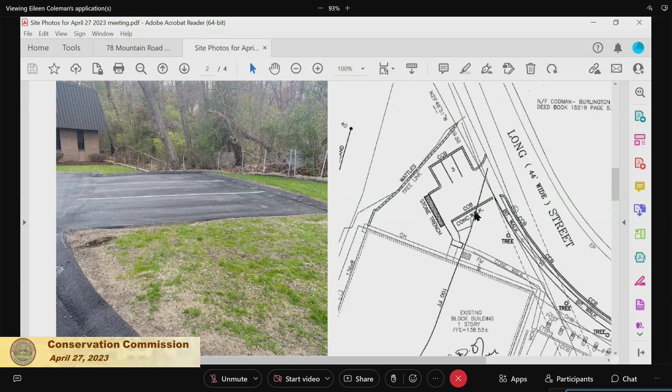Eileen, you want to? Sure, it was a pretty small project. It was adding some parking spaces, shown here, to a lot at 24 Terry. They had done an NOI to make a large addition to the lot, then closed that out, and then realized they actually wanted to add these spaces as well, so they had to do a whole other NOI. Pretty small project.

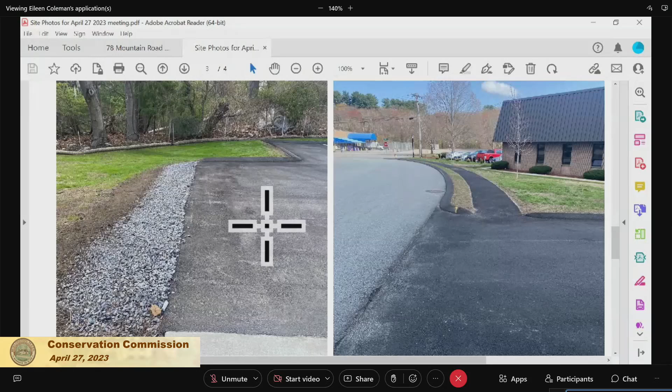I sent around a few pictures. They have a little, as John called it, semi-LID feature. They have this stone trench at the back, which is taking the runoff, and a lot of it's surrounded by grass anyway. And they had to do a new sidewalk as well, which was partially for the planning board.

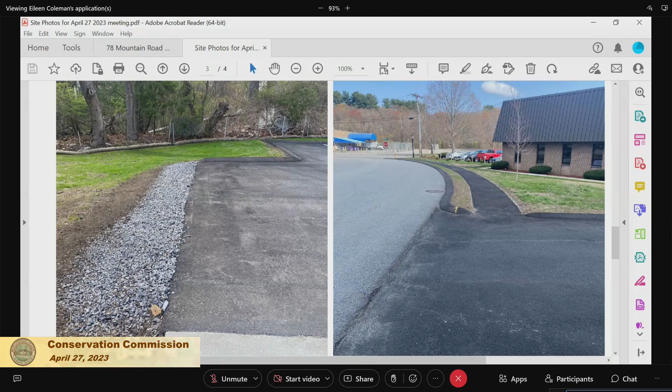I have no issues with this. It came out exactly as expected and as described, and I would also recommend you return the bond as well. Oh, what was the bond for? 2,000? Okay. Are there any comments from the commission on the request for certificate of compliance for 24 Terry Ave?

That was a small project, I remember being there. No problem.

I have seen this on my way back and forth to my home. Right, yeah, thought so.

So could I have a motion to issue the certificate of compliance to the NMB Corporation at 24 Terry Ave for DEP file number 122-672? Is there such a motion? Indra, so moved. Is there a second? Second, Rob.

Rob, how do you vote? Yes. Kent? Yes. Bill? Yes. Indra? Yes. And the chair votes yes. The request for a certificate of compliance for 24 Terry Ave is approved by 5-0.

How much was the bond? $2,000. Is the stabilization okay on that one? Yes, it is. Okay, 2,000, I would recommend you return it, full release. Sounds good.

Could I have a motion to issue full release of a $2,000 bond for the NMB Corporation, 24 Terry Ave, DEP file number 122-672? So moved, Kent. Second, Indra.

Rob, how do you vote? Yes. Kent? Yes. Bill? Yes. Indra? Yes. And the chair votes yes. The bond is fully released for 24 Terry Ave.

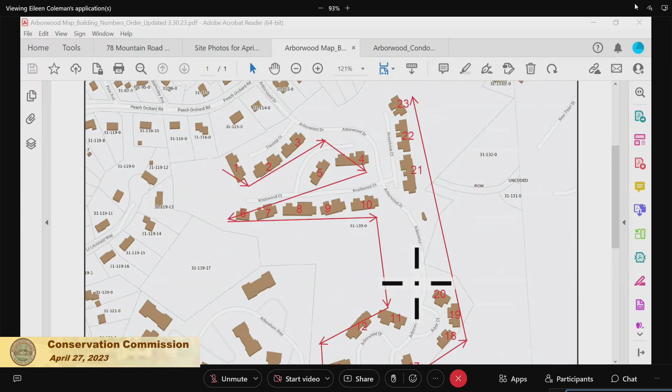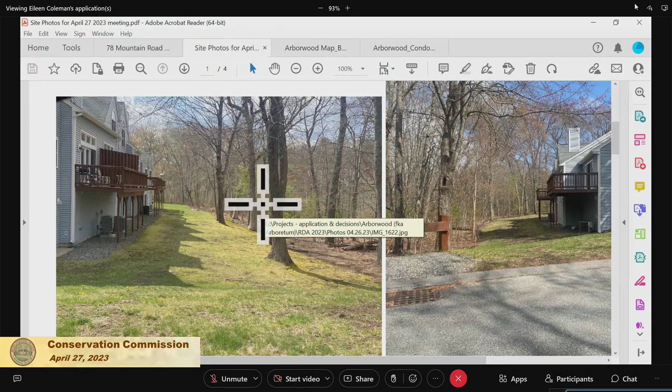I did take some pictures and sent them around to you guys, so you could get the general idea that they are close to wetlands, but I don't have any concerns that these are going to have any impact because they're really just being replaced in kind. I did have a question on the draft determination about fencing, but I think it's just the privacy fence in between two on a double. John thought that was obvious, I didn't at the time. So I have no concerns about these decks.

Okay, let's see if there's any questions. Bill, do you have any questions on this one? Just one, are you actually going to be replacing the concrete footing for each of these, or just putting new posts on existing? We are replacing the footings. The present footings are undersized, so to bring it up to code, we have to put new ones in.

And so that's not very extensive, you're just able to pull out the old ones and pour a new one, or are they prefab? They're prefab, so what they do is dig a hole. The base is 22 inches, so they dig down roughly a hole of about 24 inches, maybe a little bigger, and then put the new footing in as they remove the old, and then fill in what they've taken out, putting it back into the hole.

Are you going to use the existing posts? No, they will be discarded. The existing posts are 4x4, and code is 6x6, so we're upgrading the posts as well. All right, thank you very much.

Thank you, Indra? Well, I think that's the question I had. So you're taking out the existing footings, what is the size of the existing footings now? 8 inches round, and then it goes down to a spread footing, roughly around 40 inches down. So you're replacing that 8 inches by 24 inches, right? Yes, well actually the tube itself is roughly about 8 inches to 3 feet, and then there's a spread footing at that 3-foot point that will be removed as well. And then a new prefab, called an easy tube prefab footing, will go in, the barrel of which is 11 inches, and the footing is 22 inches. So that meets the code we're looking to achieve.

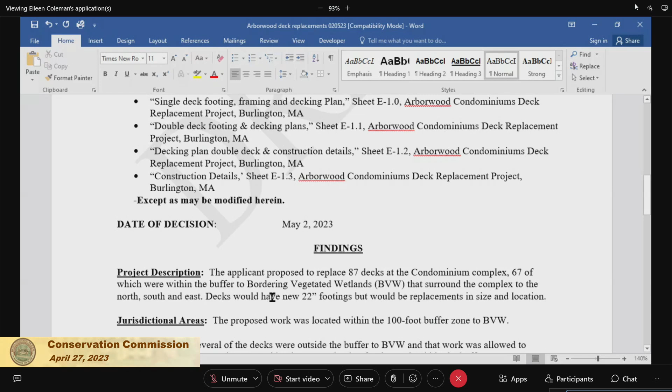I can take this bit out because it's now perfectly clear the fencing is part of the deck itself, not separate fencing. Several of the decks were outside the buffer, and that work was allowed to commence before the meeting to consider the determination for the work.

I went there a couple of days ago. Work was happening, it was in a pretty confined area. These properties are fairly small, confined sort of area.

So you're voting to issue a negative determination for work as outlined in this project description. No tree removals are permitted, no cutting of pressure-treated lumber within bordering vegetated wetlands.

We actually forgot to ask what the material is. Is it pressure-treated lumber or some sort of plastic composite? It is pressure treated, yes. All wood scraps should be removed and disposed of properly.

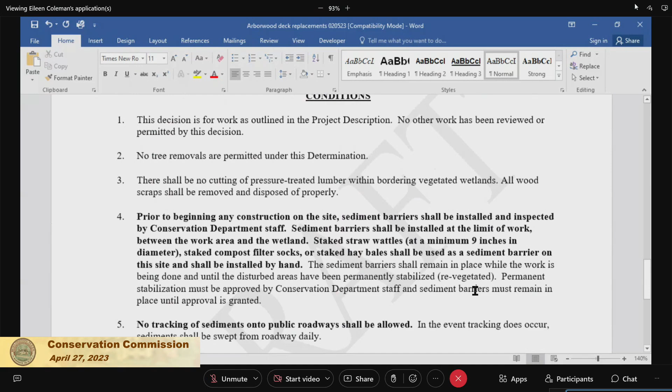They should install erosion controls between the decks and the wetlands on the ones where they were required to wait. No tracking of sediments onto public roadways, no dumping of sediment or debris into the wetlands, and no use of fungicides, herbicides, or pesticides within most of this property. This also states that we may have permission just to check on the procedure as it's happening.

All right, do any commissioners have further changes or additions to it? Hearing none, could I have a motion to issue a negative conditional determination for the property at 35 Arborwood Drive to replace 67 decks under Burlington Bylaw Article 14 and the State Wetlands Protection Act?

So moved, Bill. Second, Rob? Second, Indra. All right, Rob? Aye, I guess. Kent? Yes. Bill? Yes. Indra? Yes. And the chair votes yes by a vote of 5-0. A negative conditional determination has been approved for 35 Arborwood.

Thank you very much, thank you online. May I please request that, if possible, this determination be sent electronically so that the contractor may begin work as soon as possible, please?

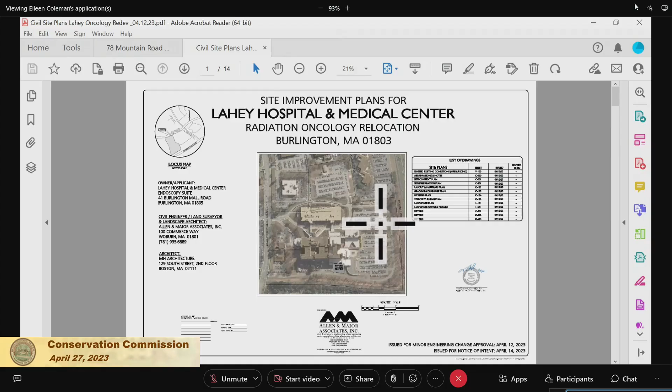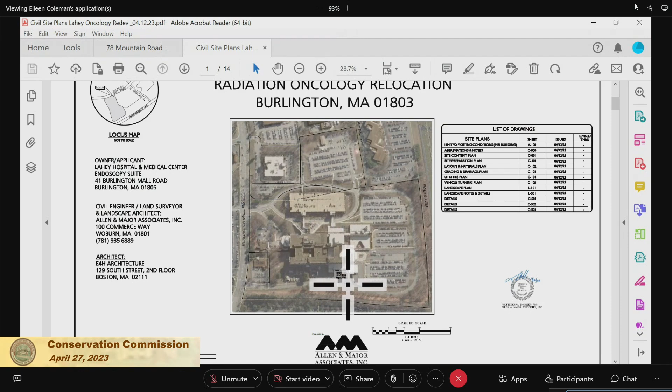The specific project, if you scroll down a little bit, is on the plan south, but it's actually the west side of the property, right where that cursor is. This project is a new entranceway to a relocated radiation and oncology unit within the hospital. Could you explain where Mall Road is relative to this? Mall Road is on the left-hand side, running north to south.

The actual location of the specific project within the large hospital campus is immediately adjacent to the helipad that we permitted and constructed about two years ago. That's right near the new emergency department, correct? Yes, the new emergency department. This particular project occurs in an existing contractor-paved parking lot right next to the helipad, right off of Loop Road.

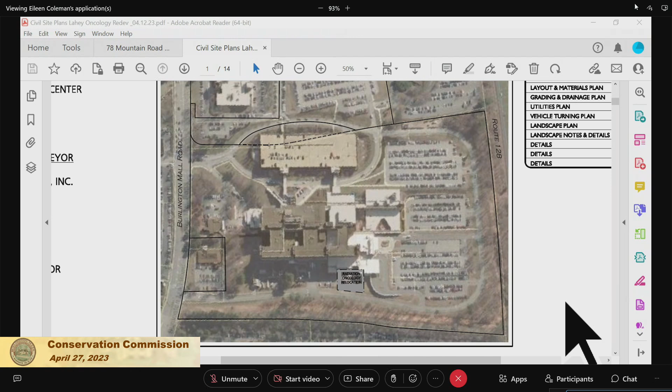So the petition before you this evening is for a very small amount of work that encroaches upon the 200-foot outer riparian area to the Vine Brook. The area is currently paved, developed, and existing as degraded with impervious surfaces. This project reduces the net impervious surface on site by approximately 818 square feet.

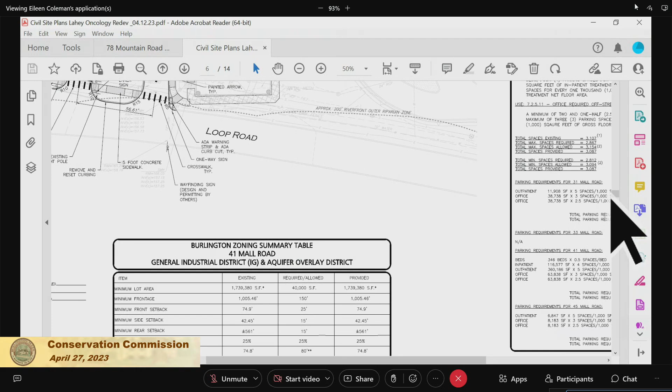If you want to scroll to the... sorry, no, I will, I was just making notes at the same time. Which one do you want me to go to? Let's go to the layout plan. I think it's sheet number five, maybe. Can you tell us how you achieve the reduction in impervious surface? Yep, I can, here we go. Am I on the right plan or did I come off? This is good, okay. So if you could scroll down just a little bit.

So Loop Road, as you can see, is labeled at the bottom. We're proposing to install a looped access drive with a landscaped area in the middle, providing access to a new entryway for the relocated oncology unit. There was a question about how we reduce the net impervious surface: under existing conditions, this is a paved parking lot.

That landscaped area in the middle, which I'll show you on the landscape plan at the end, will be beautifully planted with hundreds of new plantings, making it a nice entryway for people accessing the radiation and oncology unit. There's an overhang, as detailed in the dashed line at the top, right up against the building, and that overhang is above completely impervious surfaces, so it's impervious above and below. The main reduction in impervious surface comes from that landscaped island in the middle and some landscape islands off to the right near the helipad.

That structure you see on the right-hand side is the elevated helipad, and my firm actually did the permitting and construction oversight for that.

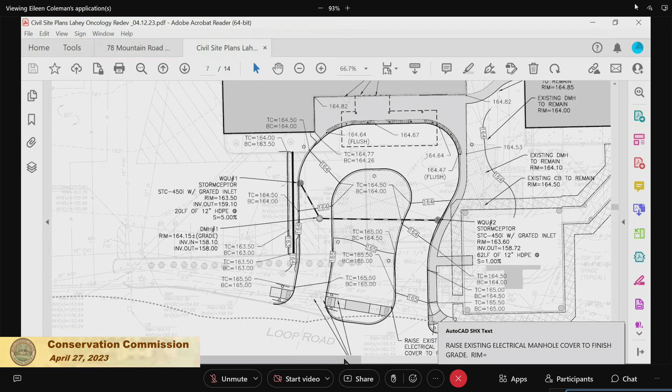Some of the larger units that Stormceptor makes can take acres of area, but they're also designed to be offline, not inlet Stormceptors. That's true. That's why the only one that has an inlet is this smallest unit, the 450i. Okay, so anyway, I think it's appropriate, we can provide additional documentation. Yeah, okay, we'll get there. All right, anything else? You have that one item on the 450i and the use of LID.

That's it. All right, Bill, do you want to start off, anything? Sure. I see the 2 water quality units on the drawing, and they both connect to a drainage manhole. I don't see where it further goes. How does that then connect to the other existing system? It's a long way. It ties into the existing stormwater system on site. And then you can see to the left in grayscale, there's a drain manhole, and it continues flowing left from there.

I need to do some research where it ultimately ends up, but my understanding was that we're reducing the net impervious area, so there's less water flowing to the system under proposed conditions than there is now.

Is that drain manhole existing? That's proposed, to be tied into an existing large diameter drainage trunk. Which is directly under it? Correct.

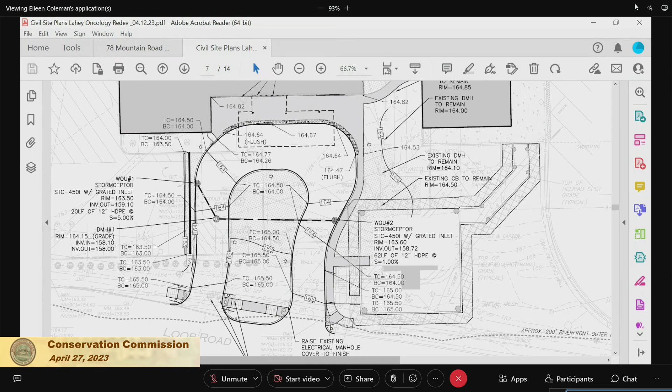The only other question I had, I was looking at your planting plan. Do you have any idea how much of the plants you're putting in are native plants? A lot of them are, if you wouldn't mind scrolling down.

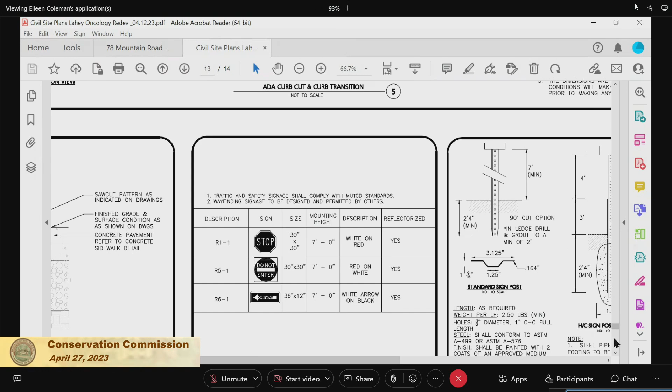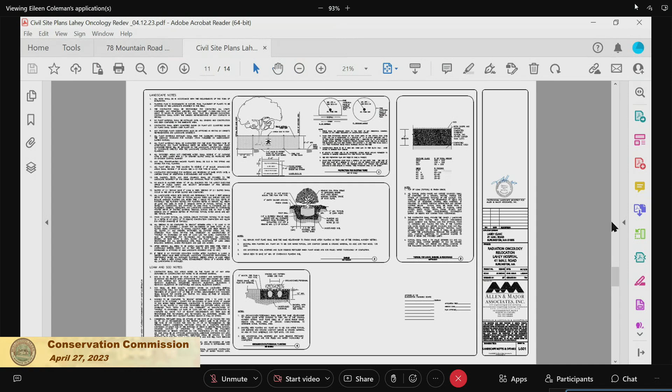I think it's the second to last sheet, L101. You'll see it, there's a lot of plantings proposed, past these details. Oh, more further, I think it's past this. Yeah, it looks like it'll be beautiful, but I'm just curious. Oh, you know what, I'm sorry, that's the end, I've gone too far. No, that's okay, I'll go up and zoom back in when we find the right one. One more up, sorry, L101? Yep, up L101, one more. Here we go, there we go.

If you could just zoom in on that table, will do, that'll give us the answer. You want the table? Yes, love a good table. Well, that makes sense.

As you can see, if you could just zoom up on the landscape plan real quick. Sorry, you want back up on the plan? Yeah, I just want to show how much plantings we're using.

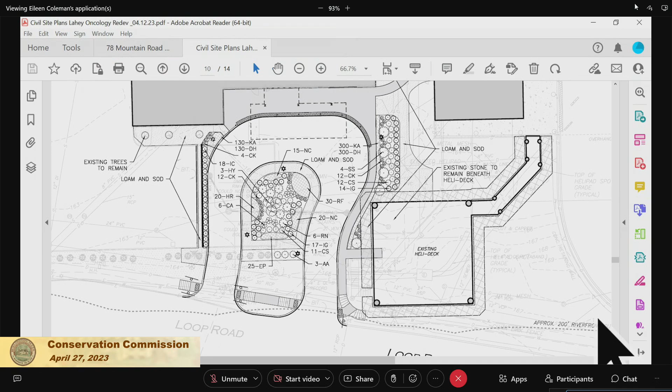There is a significant amount. As I mentioned, there's a lot of plantings in that center landscaped island, then more on the right-hand side near the sidewalk, and more on the left, sort of used as screening. There's 3 existing trees that will remain in front of the building on the left-hand side. That gives you an idea of the area we're planting, it's pretty significant. Then if you don't mind scrolling down to that table.

On the left-hand side, your question was about native plantings. You'll notice there's a column with asterisks, which denote the native species. So the ones with asterisks are native, the other ones are not. But we did have a professional landscape architect thoroughly put together a good list of plants.

Several are cultivars though, they're not straight natives, they're cultivars. What's that, these ones here? If it says something like that ilex is a cultivar, the Ilex glabra shamrock, that was my comment as well, most of them are cultivars, not the original native plant. They're all an offshoot called sky pencil or shamrock, so they're not truly native species, but not the particular cultivar.

Okay, maybe there was some confusion on my landscape architect's behalf, I'm not a landscape architect, I don't pretend to know very much about plants, just enough to be dangerous. That's something we can look at. Where possible, we'd like to see a true native, if it can be arranged and you can source the material. That's part of the issue too, sometimes just the availability and sourcing plants is difficult, we try to get ones we believe we can find and install at the site. Got it, okay, those are my comments, thank you. We can review that, thank you for that.

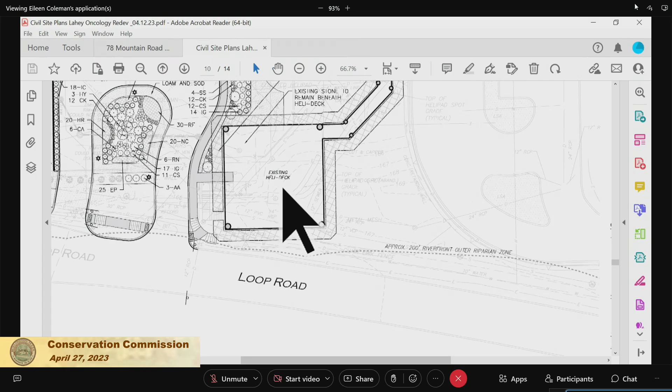Okay, Indra, anything? Yeah, how much area is there inside that loop, the pervious area? How much pervious area is in that landscaped area? I'm not sure right off the top of my head. Do you want to measure it? I see that you are providing trees and shrubs, probably about 50% of that area, correct? Sure.

And the other 50% of what you're going to do, you just leave it? Oh, well, there's existing landscaping at the front. You can see there's a tree in there. I don't know what else is in there, but I'm assuming there's more existing landscaping along Loop Road, and that's why we didn't propose anything there. The cluster we're proposing in the middle was previously a parking lot.

So when we convert it to landscaping, we need to plant that out. But the area closer to Loop Road is already grass and trees. In here? Correct, yeah, you can see that tree right where your cursor is, right there. There is a tree there, yeah. And some grass, yeah. I believe the intention was to keep the existing landscaping and infill areas that didn't previously have landscaping.

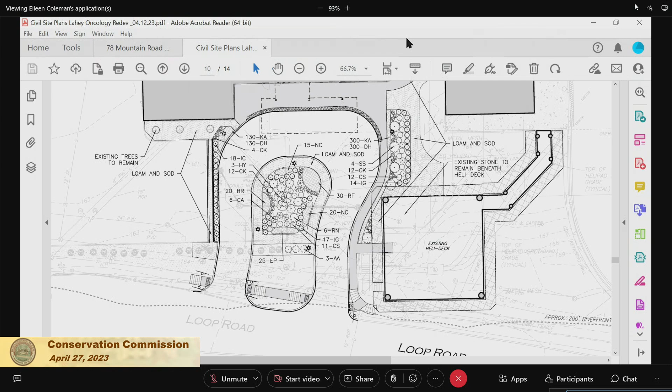And although the majority of the planting area, or all of it, is outside the 200-foot riverfront, if your landscape architect could take a look at shifting some of the plants to more purely native plants for this area. Pure native, yep. Okay, I think that's fair, at least shift it in that direction, and see what that person could come up with.

Is there anything else that you think you have to respond to? Okay, so I got 4 items. I think that covers it. Oh, one more thing.

Are you using any existing catch basins at all in the area, or are they all new? For the project, it's just the 2 new ones. Just the 2 new ones, okay, all right.

Okay, that's all I have, so I guess you'd like to be on the next meeting for May 11th, does that sound right, or would you like to go to May 25th? May 11th works. All right, so could I have a motion to continue this public hearing for Beth Israel Lahey Health to the commission's meeting of May 11th, 2023? Is there such a motion? So moved, Rob? Second, Kent? All right, Rob, how do you vote? Yes. Kent? Yes. Bill? Yes. Indra? Yes. And the chair votes yes. This hearing is continued until the May 11th, 2023 meeting of the commission.

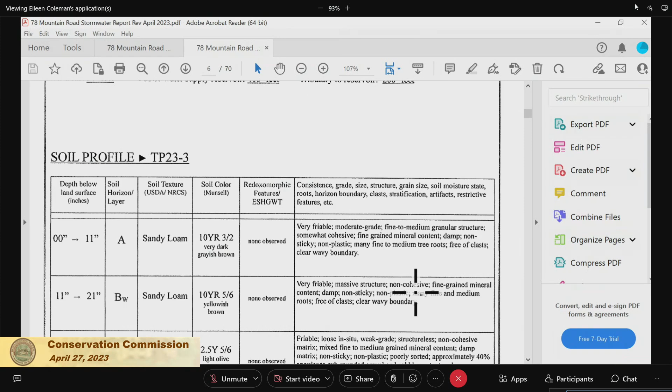Stormwater report. So what are you looking for exactly, Eileen? Didn't bed 2 get eliminated because you made the other ones? Well, according to the thing that I just gave you, it's still there. It's only circled because I questioned it. That diagram is still in this. So, test pit, maybe? No, it's not the test pit. It's the actual...

Where do I find it? The actual, what do you call it? Track. What do you call it when there's a... I'm sorry, a subcatchment, post-development subcatchment. So subcatchment number 2? Subcatchment, yes. That's what I was trying to understand. Whatever that is, 2S, post-development, no, 3S, it's 3S, so what happened to the infiltration?

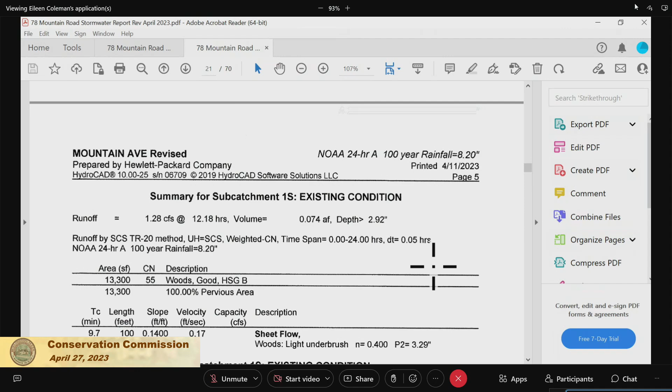Did I just miss something? Is somebody else talking? Okay, I don't think so. All right, so why don't we put it on the list as subcatchment number 2, infiltration, question mark, and we'll take a look at it, okay? Okay. All right, that's easy.

Anything else, folks? Yeah, can I share? Oh, yeah, sure, definitely. So one thing I missed on the site plan, which is on there but hard to see. I noticed when I looked at the aerial of the lot. I'm sharing it now, hopefully.

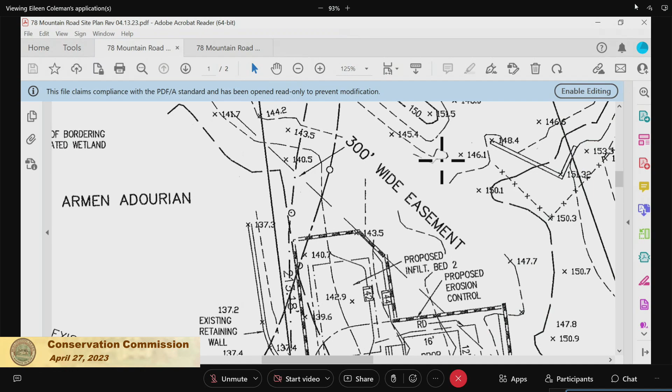So I guess my question is, given all the slopes, we've asked for some planting, but realistically, with the slopes sloping towards the neighbor's yard in the back, right now the neighbor doesn't get any water from that property. But you removed all the trees, so now it's a different issue. We've seen this many times - people didn't have water, they decided they don't like trees, removed them from their yard on a slope, and now their yard floods because hundreds of gallons of water aren't being taken up by trees anymore. So I want to know how you're going to prevent, with the slope, water from washing onto the neighbor's property.

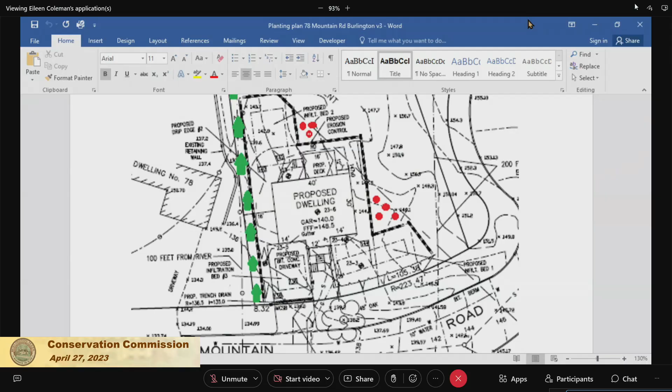I'm not saying it will, I can't tell you it won't, but the engineer designed a grading plan with a swale, so he took that into consideration. But where does the swale go? Can we go back to the plan? It goes up the left lot line. I had pulled up the planting plan - can you show me the swale? How far back does it go? It's hard to tell from this, where does the swale go?

Does it go to the back of the yard, the back of the lot? Yeah, it's going right up to the erosion control line. It doesn't go beyond it? No. So this line is representing the swale? Yeah, the swale's inside that, right on the property line.

There's a retaining wall there too, that double solid line. You can go over there and point if you want. This here is the retaining wall, right? Feel free.

Oh, no, the existing retaining wall is here, the old-fashioned way. This is the retaining wall right here. Where's the retaining wall? This is the neighbor's retaining wall, right there.

And this is the proposed swale, well off his property, and it looks like it's going right up to here. And there's arborvitaes, which are gonna be mounded up on this side, close to the neighbors. So all the arborvitaes are gonna be mounded a little bit, the swale's gonna be here, and flow into these, I think this chamber in the front.

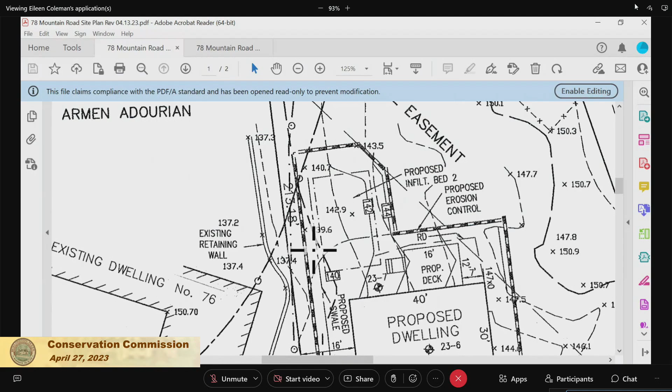Proposed infiltration bed 3 right here. So the proposed swale is gonna go right into this bed. Proposed 3, yeah.

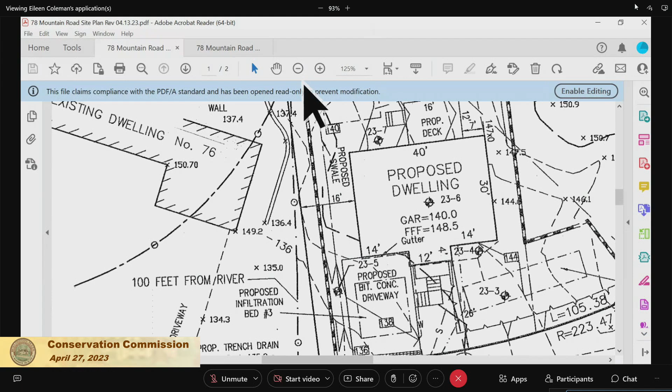So this line, this solid line right here, that's the swale line right there. So I'm wondering whether you need the swale to go further back, much further back, to take up any water at all that might be flowing in that direction. You have some steep slopes. I just think you're gonna get water onto your neighbor's property now that you have no more trees on it, and you're gonna have just new plantings.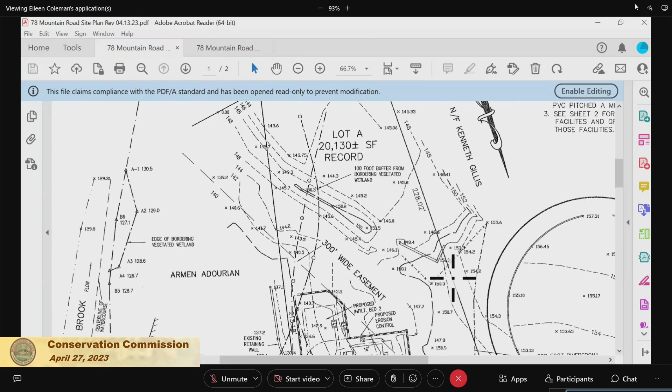Is there a detail of the swale? I don't remember seeing one. Is there? I believe there is. Oh, there is? Is there a detail? I don't have a paper copy. Because I wasn't clear how wide it is or how deep it is. But maybe John again.

Can I ask you a question here? Look at the slopes, look at the plan. Plot plan, yeah, we don't have paper copies. Do you have any concern, or do you think, from a technical point of view, we're okay as far as water running off onto the next property?

I mean, I think a properly constructed swale would intercept any water flowing off the property. But the swale goes as far as here, and the steepest grades are back here. Right, so it's flowing towards the street. It's flowing like upper right to lower left. So you think the water will flow and get caught by the swale as designed, or does the swale need to go further back?

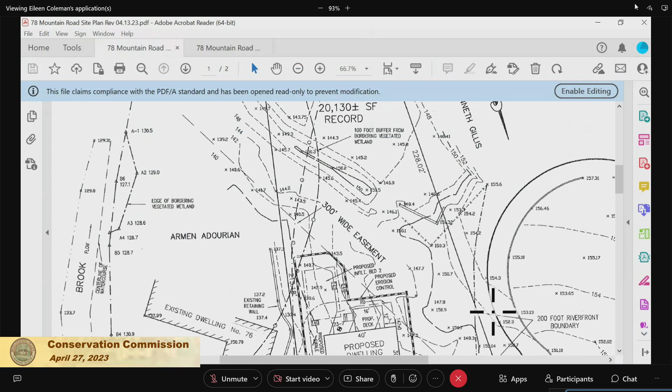No, I think, as the further you get back, the lower the property goes, it starts dropping down. Where the swale ends is the highest point. So the swale goes as far as these grades right here? Is that what you're saying?

Yeah, just about the Eversource easement there, the beginning of the easement. It seems to stop right at this 140.7 elevation line, right? Yeah, just a little bit past it. Close to the end of the erosion controls, about 140.5, it starts creeping up.

There's no indication that the swale is extending further back. It's not on this plan. I don't have a paper copy right here, but he says it ends right here. So this water's going like this, and it ends right here. It's not up here. This is not the highest point, it's the lowest point.

Would he even be allowed to put a swale onto that, I was just thinking of surface water flowing. Yes, it's not a planting. He should, yeah. They're not proposing to do any work there, though, so whatever goes down, except there's no trees there now.

I guess, to be honest, I'm not sure how big of a problem it is. But I would like to get a better idea of the depth of the swale, just so we know what we're talking about. Are we talking about 2 feet or 4 inches? I would like to suggest you at least consider the merit of extending the swale further. I'm not gonna tell you what to do, because I'm not sure how big of a problem it is, but...

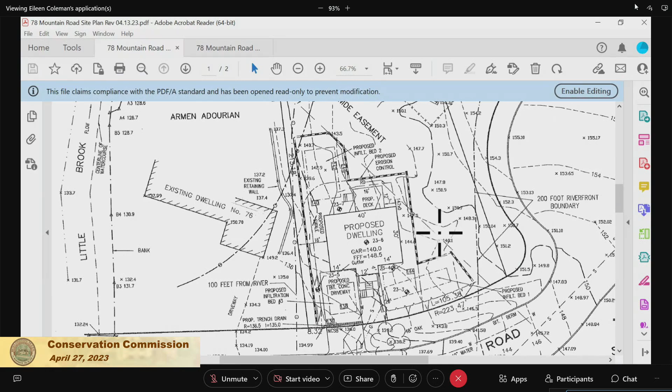It's Joe, right? Yes. Joe, so here, let's make sure we're all on the same page. Ready? Yep. All right, so we're gonna look into the infiltration of subcatchment number 2, clarify it.

A planting plan for the back of the lot, as discussed. That's the gravel part, down the back of the house lot that goes into the... you planted 50 arborvitaes back down there?

Yeah, so he had planted 50 arborvitaes, how many years ago? 10 years ago, and Eversource just keeps, they wipe out whatever's in their path, they spray. They tend to do what they want. You can see what they're doing now in town, they're going through, whacking everything in the easement. I know it, that's their aggressive vegetation management plan.

Right, so I think the spray's every year. Really, okay. So the second thing is, let's take a look at what's needed back there. What I heard our administrator say is we need a compensation plan, a planting plan for all the trees that you took down, and that's part of your lot. So why don't you take a look at it and see what you come up with.

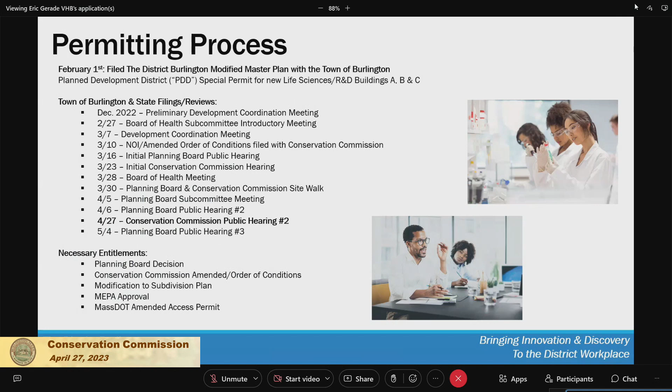Great, thank you. Eric Gerade, Civil Engineer, Project Manager with VHB. I think we can skip over the essential permit process of where we're at, and just jump in to remind everyone: the proposed amendment to the existing order of conditions on site is primarily related to these two hatched green areas related to the Building A area, which was the former Phase III office, as well as the Brook Walk, the Vine Brook Walk pathway to construct that.

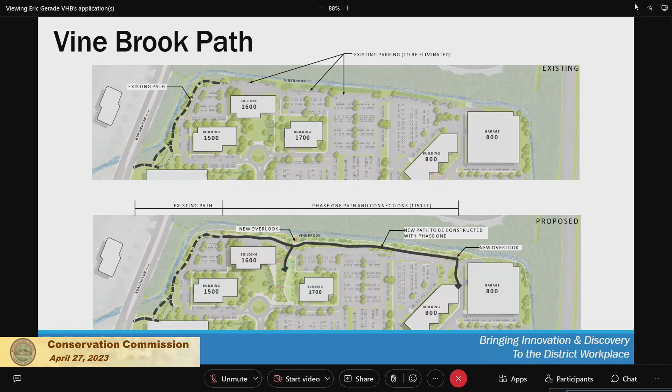So part of that, just to refresh on the Vine Brook path, showing the existing limits of the path and then the proposed limits. Chris, I don't know if you want to expand on the new pieces along the path that we're considering.

Yeah, just quickly, Chris Jones, IBI Group, landscape architect. We had a really productive first subcommittee meeting with the planning board. One comment on the Vine Brook path was interest in including some low-level bollard landscape lighting. We're working to coordinate incorporation of about a 50-foot on-center spacing. It's not really intended to light from photometrics, but more of a guide when it's darker out or dimly lit - more of a wayfinding component.

Fortunately, we can take the existing pedestrian and parking lot lights we've been using - they have a bollard version, so we'll have a consistent type of fixture at a low level. That's the primary add, along with wayfinding signage along the path that not only takes you to the path but also marks the overlooks and measured distances along the path. That's probably the biggest update since we last met. Does the commission have any further comment on that?

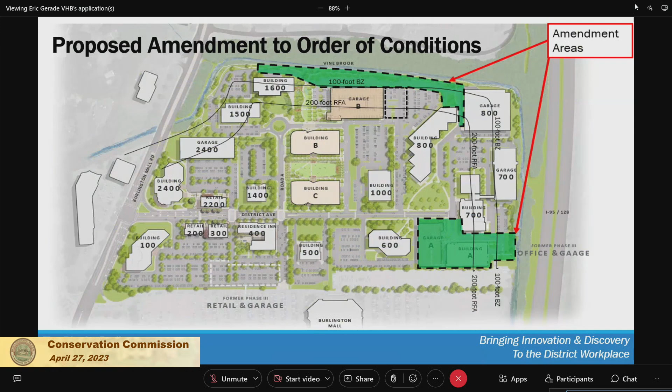You were going to provide a narrative on the pipe going into the stream. On the top of the page, there were two pipes going in, one of which has temporary impacts to the bank. We provided that narrative with exhibits, and we slightly tweaked the angle of those pipes so they're now exactly on top of the existing pipes. If we get out there and those pipes are okay, we'll just reuse them; otherwise, we wanted to make sure they're called out to be replaced if needed, capturing those impacts - about 13 linear feet.

Are you all set with that? Honestly I hadn't even noticed, I'm so sorry - but I think we're fine with that. Yes, that was in the letter, the response to comments dated April 21. Yep, I got it right here, okay, all right.

Something about a riverfront analysis - riverfront, something with the word degraded. Does anyone know? I think it came up last time where alternatives analysis was asked, and being that it was completely degraded under existing conditions, it's not required under the regulations, so we're all set there.

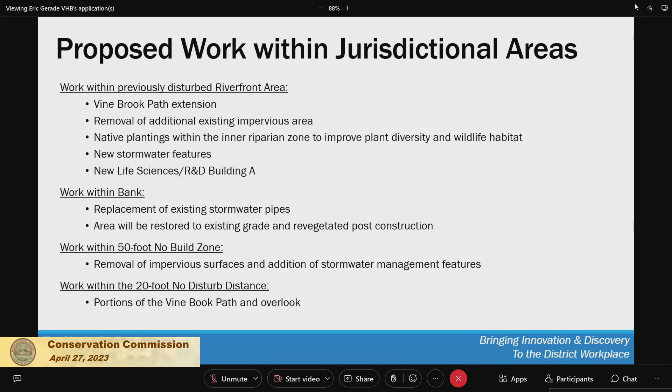Relative to the scope of both projects, when will this be done - the trail along Vine Brook?

So we're proposing - the other one, too, if you want to. Um, the one that's there. Sorry, I was just saying there's another microphone. Oh, there - if it's easier. Thank you. I didn't think to even use that one, to pull it over.

So we're proposing to include the Vine Brook expansion improvements as part of whichever phase goes first, whichever building goes first - it would be part of the first phase. So that'll be conditioned on us, we assume, within either here or the planning board decision.

Okay, anybody on the commission, before we leave the amendment, is there anything more about the trail? Any questions at all?

Okay, we can go to the full hearing on the other one.

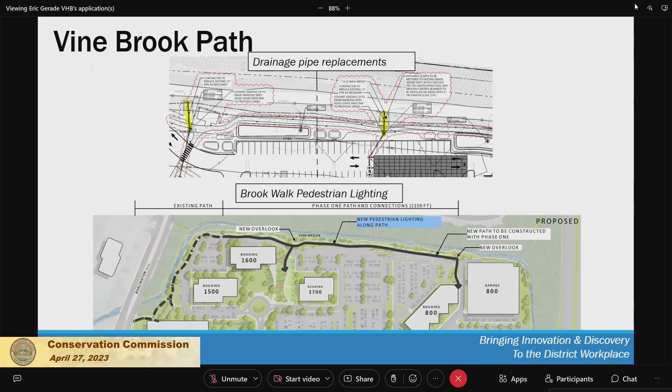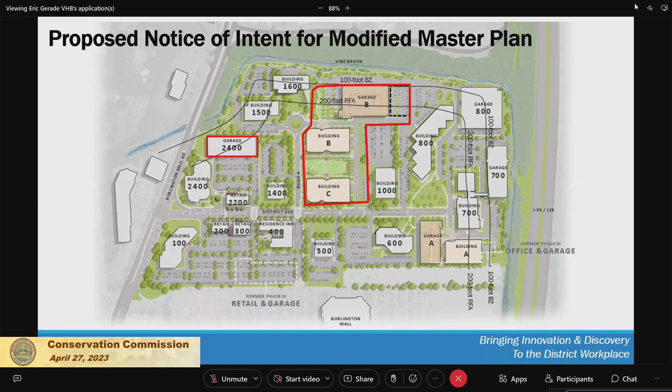Moving on to the new NOI based on buildings B and C and the garages - no new material to present, it's essentially just a recap. The general work within the jurisdictional areas includes the proposed parking garage, new walkways and pedestrian access from the garage to the building, stormwater features, the impervious area mentioned earlier, native plantings, work within the 50-foot no-build area, and the replacement and reorganization of existing pavement areas and parking lot access.

That's primarily out in the parking field area, with no proposed work within the 25-foot no-disturb zone. Moving in, just a recap of the stormwater management design: proposed surface infiltration basins and rain gardens to provide LID surface runoff and treatment for phosphorus and TSS, and then a series of underground infiltration basins, primarily for each building and structure. Buildings A, B, and C will each get a subsurface basin, as well as the parking garage, providing additional infiltration and the required stormwater treatment.

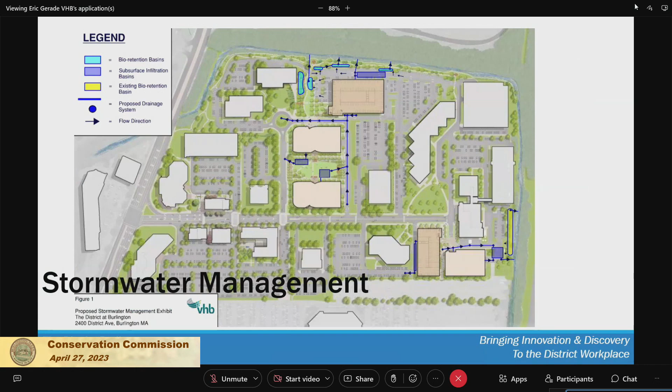So essentially, the project benefits, like we had mentioned before, include the removal of that significant impervious area, the native plantings, which Chris mentioned we'll double check to make sure those cultivars are straight, and the significant increased plantings around the site overall. The whole thing sounds much more attractive. It really does.

John or Eileen, do you have anything further on the new lab buildings and the garage? Nothing to add. I think the stormwater management plan is great, and it'll be really good to have as a model to show other businesses and developers how to build rain gardens.

Okay, Bill and Indra, anything further? No, I agree that the things done here with the rain gardens have done well. Yeah, I'm also happy to see that, with all the comments. All right, so that's two of them happy. Kent? I'll concur. It looks like a good project and I'm looking to see how it turns out. Okay, that's three happy. Rob? Yeah, I think I'm happy too.

I sort of like seeing on the right side where Vine Brook turns, even though it's not part of the path for pedestrians. It's nice to see that consideration of the stormwater area between the highway and the property kept, even though it's not something people would regularly see or go to — considering that area for stormwater is really nice too. I think this is a very attractive project. I think you did some nice work on this. Thank you.